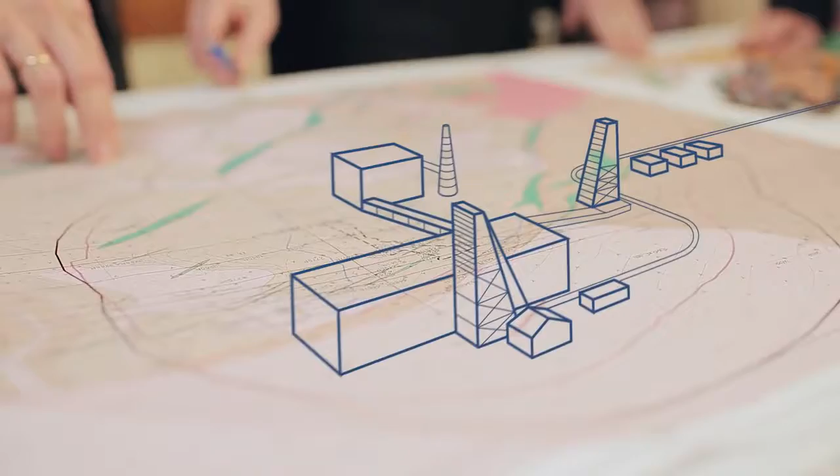The mining department of the Uralmekhanobr Institute was founded in 2001. The Uralmekhanobr miners actively participate in developing a resource base for the ferrous and non-ferrous metallurgic industries, as well as the gold, tungsten, potassium and diamond mining industries in Russia, CIS countries and Africa.

Today, the mining department consists of 5 sub-departments and employs 100 people. 4 chief project engineers are in charge of coordinating the work of the Institute's departments and client interfacing.

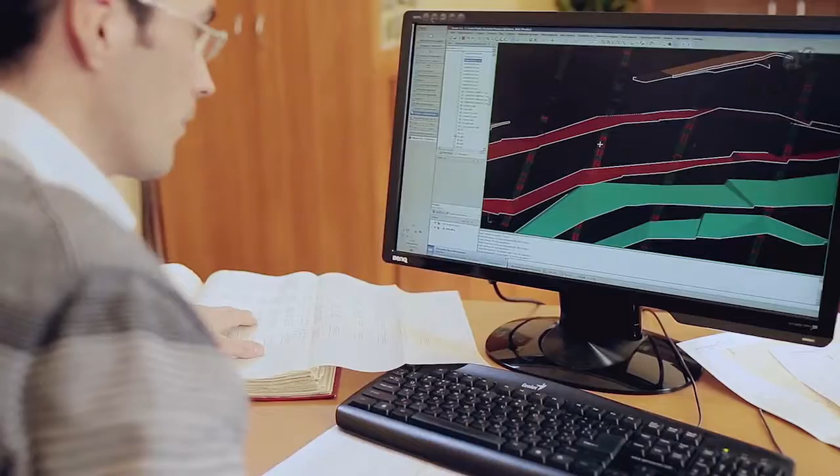The Institute's Department of Geology prepares baseline data for research and development, as well as the geological and commercial justification for mining projects. The department specialists develop feasibility studies of exploratory and permanent conditions to verify and update estimates of a field's reserves and assist in updating the State Register of Reserves. They reassess the estimates of solid mineral reserves of operating mines and prepare geological databases for mines and models of fields.

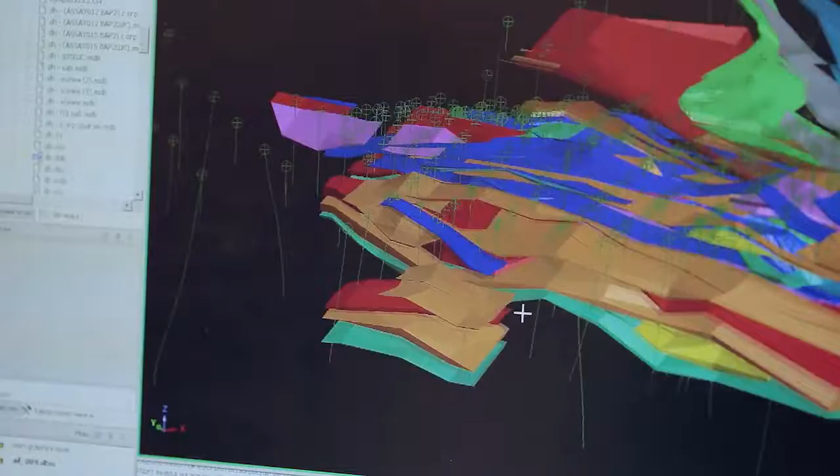Serious scientific prep work must take place before construction or renovation work on a quarry or mine can begin. The specialists of the Mining Science Department handle this task. Every year, they conduct more than 30 scientific studies for quarries and underground mines. They create efficient technologies for mining peripheral ore reserves.

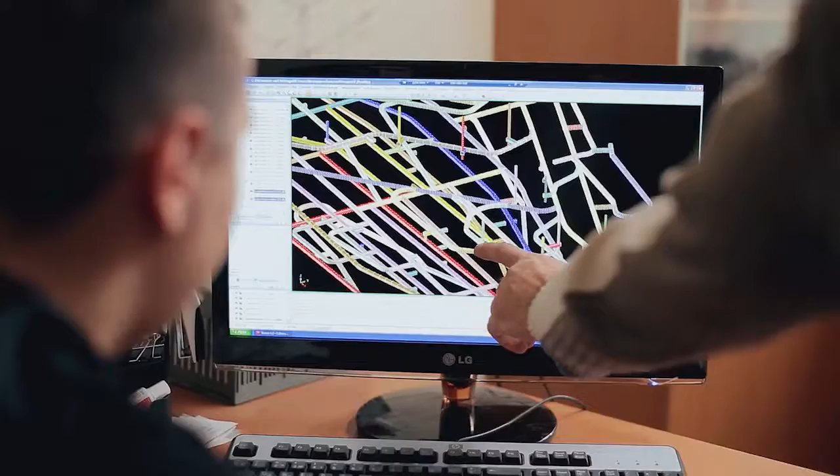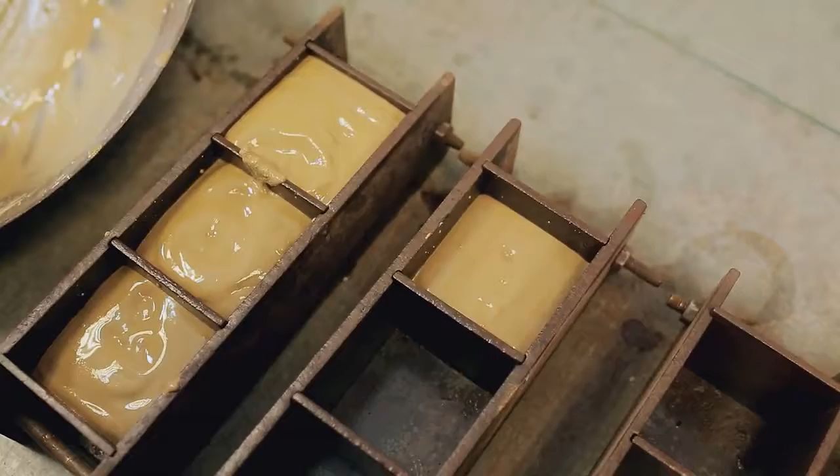They analyze and monitor the stability of quarry walls and strata movement, as well as the seismic and blasting safety of mines. They develop formulas for hardening filling mixtures based on locally available materials and the technology for filling mined spaces. The workspaces of the Mining Science Department are equipped with state-of-the-art equipment and instruments that allow precise and accurate research to be conducted and enable timely preventive measures in the event of changes in the mining and geological conditions.

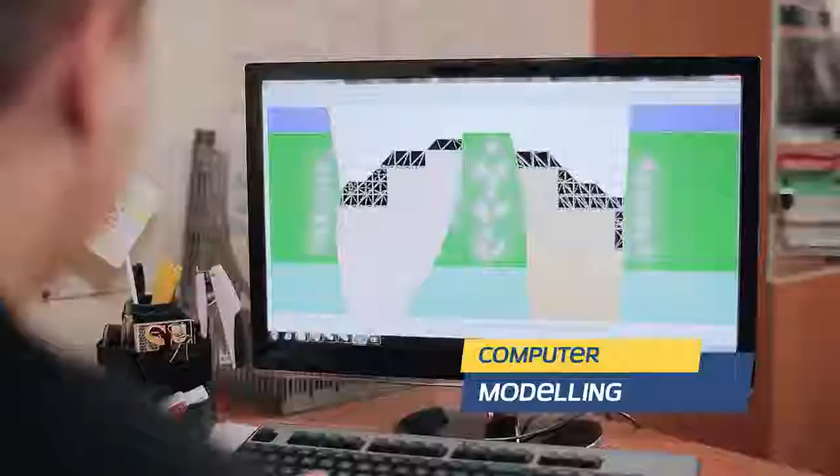This approach makes it possible to save lives and protect the health of mine workers, while reliably ensuring the smooth operation of mines, supporting the sustainable use of natural resources, improving raw material production, and reducing capital and operating expenditures. The scientists and engineers at the mining department introduce breakthrough technologies in mines, saving billions of rubles.

For example, when designing a 200-meter deep quarry, each degree of increase in the overall slope of the quarry walls reduces the amount of excavation by roughly 1 million cubic meters. 3D laser scanning of mines makes it possible to improve the monitoring of mines. When switching from open-pit mining to shaft mining, the peripheral ore reserves remain enclosed within the quarry. The specialists of the Mining Science Department develop technologies for mining these sections on the basis of studies and quantitative analyses.

The introduction of new technologies made it possible to extend the service lives of the Gajski, Uchalinski, Cybajski and Malajozny quarries, and to increase ore output by 1 million tons. Advanced technology for drilling and blasting work enables the Alrosa mining company to reduce its consumption of explosives by several thousand tons. The proposed technology will make it possible to reduce explosive costs by up to 60% in underground mines alone.

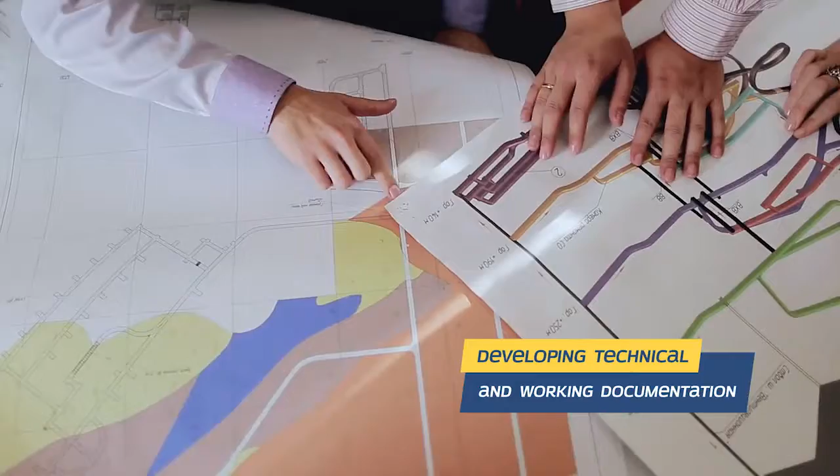At this stage, the Mine Design Department arrives on the scene to build on the work of geologists and other scientists. They develop the design and working documentation for the construction and modernization of the mines, calculate the justification for investments in construction, and conduct feasibility studies of exploratory and operational conditions.

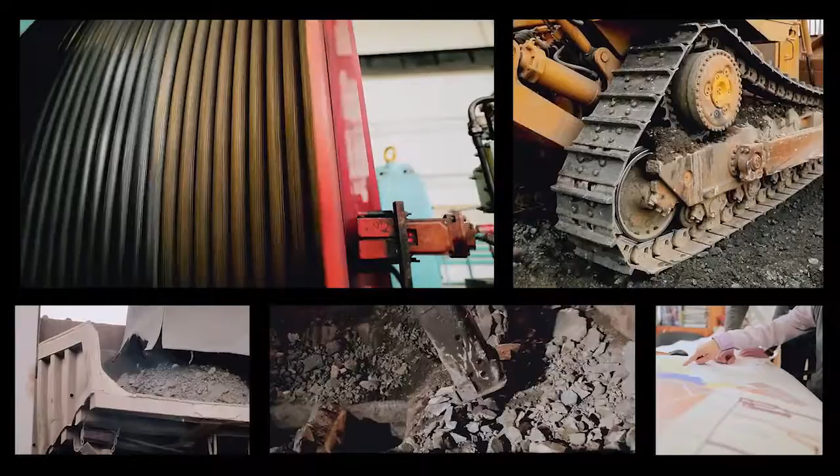This is followed by the mechanical phase of mining operations, developed by the Mining Mechanics Department. They design mine surface complexes, ventilators and compressors, drainage systems for quarries and mines, underground maintenance complexes and storage facilities for fuel, lubricants, bulk materials, among others, and crushing, batching, and conveyor complexes.

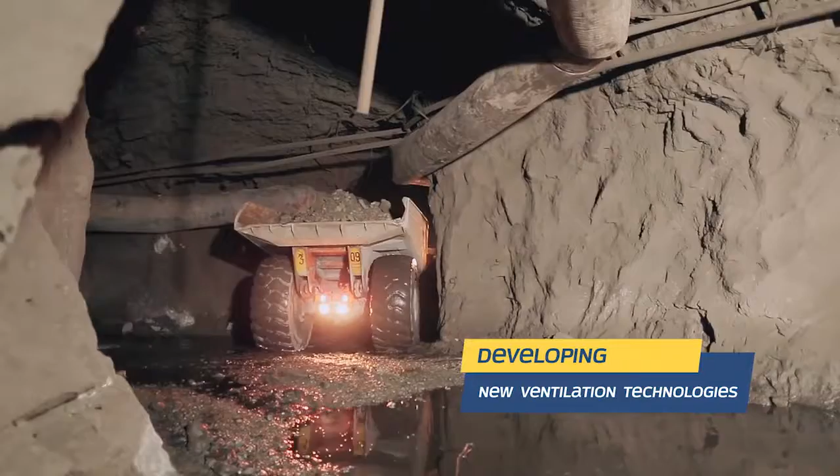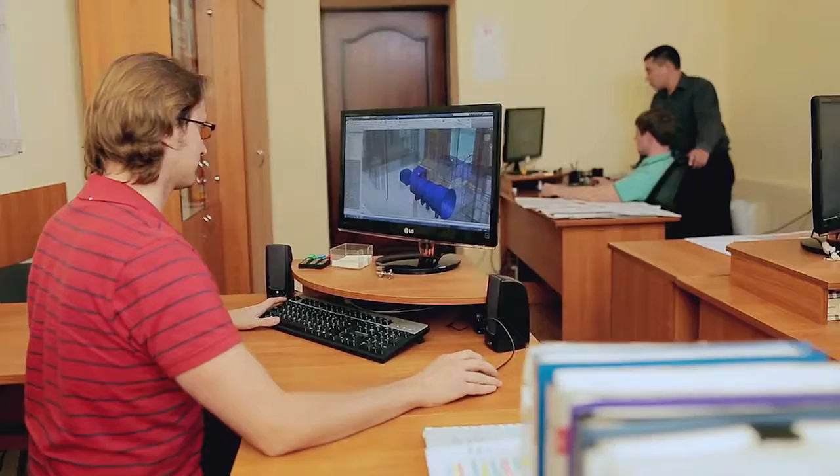The total volume of excavated mine space is increasing. The current capacity of mines is large enough to contain several cities. Therefore, the airflows in mines must be controlled professionally and reliable ventilation must be ensured. The Mine Ventilation Department handles this task. New designs from this department make it possible to properly ventilate mines while cutting costs.

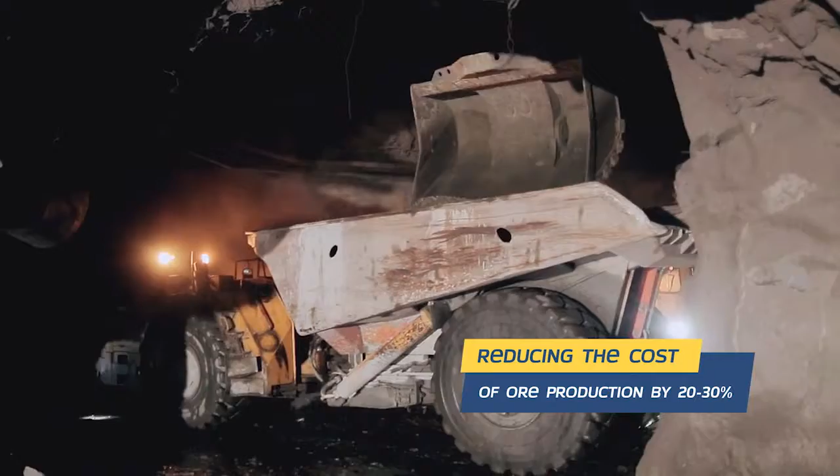According to preliminary estimates, the introduction of a complex of technologies based on the latest approaches to ventilating mines can reduce the unit cost of ore production by 20 to 30%. For example, in one mine, it was possible to avoid driving 2 ventilation shafts priced at about 6 billion rubles.

Cost reduction is an important factor, but the most important thing in mining is to ensure workers' safety and provide comfortable working conditions. The work of the Uralmekhanobr Institute's mining department helps people to live a healthy life, ensures the sustainable use of natural resources, reduces both operating and capital expenditures, and supports Russian metallurgy and the development of mining cities and towns, while providing warmth and comfort to millions of Russian families.